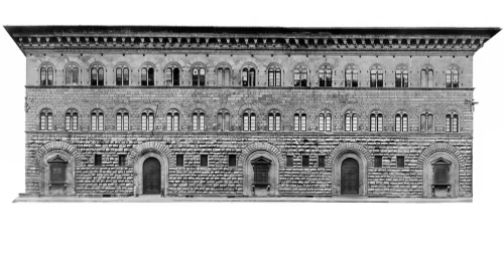By searching a similar case in which the office building played a radical role in the development of the city, we found a precedent in the Italian Renaissance, Florence. Here the palazzo was at first used as private residence, representing a rich social status.

Progressively, it became a hybrid combination of residence and business, like banks or commercial activities. The palazzo in Florence became such an iconic element that it's still considered one of the most recognizable building types, thus integrating part of the cultural and historical values of the city.

So, what if all the post-war office buildings in Rotterdam could rise in dignity and become a recognizable layer of its urban history? And what if their strategic reuse could transform them into platforms for an architectural reinvention, free from the preservation constraints that heritage buildings have in other cities? Then tourists could have as well a PALAZZI of Rotterdam tour.

Does it still make sense then to keep rebuilding now that there is no investment power in real estate? Or does it make more sense to reuse the vacant properties in order to consolidate their urban role? Reuse costs in principle 30% less than new construction. That is indeed a lot.

So how could we develop a method capable of helping stakeholders to afford with confidence a renovation project? And what are the factors that can guarantee the success of a reuse project and ensure its valuable investment? In order to understand this, we studied one of the most successful examples of reuse, the Van Nelle factory.

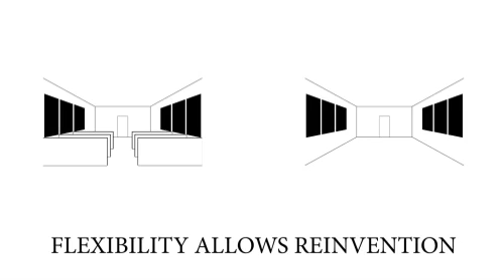On this base, we started a design by research process that at the end brought us to sustainable design proposals. Step 1: Database of office vacancies. We managed to collect over 500 office and utility buildings in Rotterdam, some already renovated, many reused for the creative industry, many more with very inaccessible data.

Step 2: Analysis and maps. Beside the defined vacancy map, we studied the key projects developed by the Municipality of Rotterdam for the City Planning Guides 2030. We superimposed the two maps, and we identified the areas with different speculative power.

The vacant buildings rising on highly speculative areas cannot be subject to reuse, since their owners will wait for the right moment to maximize their investment and substitute them with brand new skyscrapers. By doing so, we managed to exclude from our study the portions of city destined to speculation, concentrating our attention only on the buildings potentially subject to reuse.

Step 3: Database of interventions. By analyzing the global examples of reuse, we were impressed to find out that this discipline is not only diffused in our continent, rich of historical buildings. Even countries in deep real estate boom, such as China, are already developing several reuse projects, often very valuable. With this database of examples, we listed all possible architectural interventions already tested in real projects.

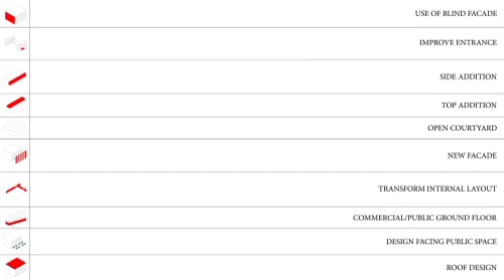Those interventions range from minimal maquillage of the facade, improvement of the visibility of the entrance, to total floor plan reorganization, or extreme building additions and amputations.

Step 4: Evaluation criteria. We based our study on a matrix used in real estate literature to evaluate the possibility of renovating a property. Those criteria are based on location, current state of the building, and market. The ultimate premises of our study are urban. For this reason, we extended the evaluation factors and added the values about the speculative power of the locations.

We created an evaluation system that starts with a long list of possible functions applicable on each building. The evaluation proceeds by eliminating the functions that do not fulfill the minimum requirements for quality of the location, urban speculation, architectural and technological state of the building, and the surrounding quality of the urban space. Only after these evaluations, we reached a sustainable design proposal.

For each building, we produced an evaluation matrix for location, speculation, and for all the other variables. All matrices gave us a short list of possible functions suitable for each building - a real ID for renovation. The complete evaluation package gave us the possibility to work together with municipality and stakeholders in order to find tailor-made solutions for the reuse of the selected buildings.

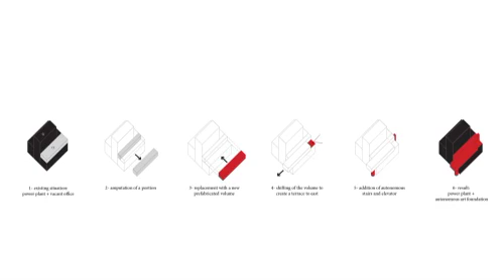Its marketing program includes a biannual promotion of fine arts and classical music. The current situation combines the main production building with a small office space. We amputate part of this space and replace it with a new prefabricated volume. Then we shift this volume to west in order to create a terrace to east. We add autonomous stairs and an elevator, and create an autonomous building on top of the existing one.

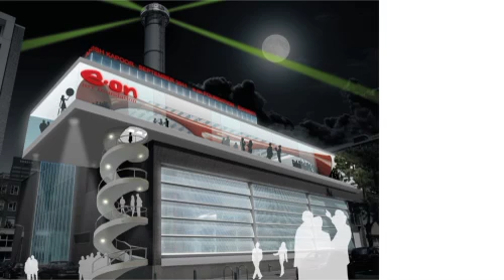The E.ON Art Foundation internalizes the marketing investments of the company, while adding a new cultural facility in the heart of the city. The management of the foundation can be easily carried on by one of the several private art institutions, while remaining a flag of the E.ON cultural involvement in Rotterdam.

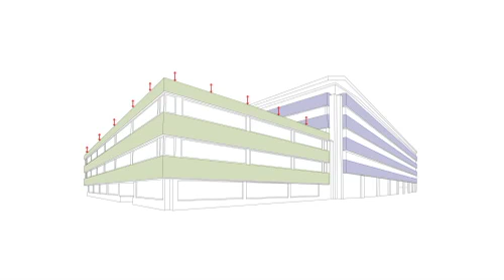Case Study 2: Zalmstraat Houtlaan. These two office buildings, ranging from 2 to 4 floors, stand in front of the Erasmus Bridge, one of the most exclusive locations in the city. Both buildings have a linear facade pattern. The lower building has the potential to extend vertically, due to its current poor use of the roof that becomes an unavoidable panorama from the taller building.

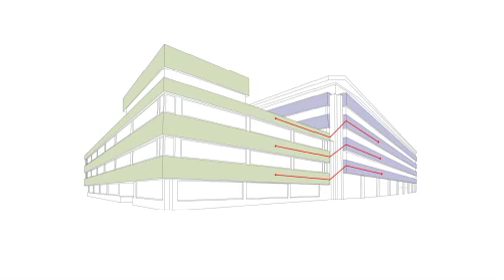For this reason, we add a penthouse on its top, with a private garden and a very luxurious view on the bridge. In light of the linear continuity of the two facades, we propose to wrap the two constructions with a unique surface, capable of making a unique building out of the two.

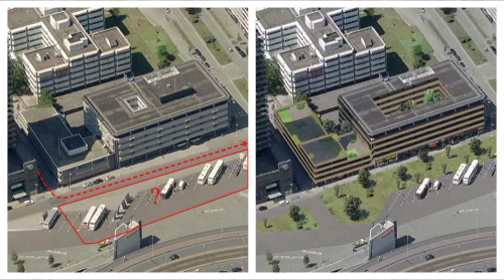On the urban level, the block suffers the poor quality of the public space, currently used as traffic circulation and bus terminal. We suggest to offset the traffic far from the facade and create a green plot only for pedestrians.

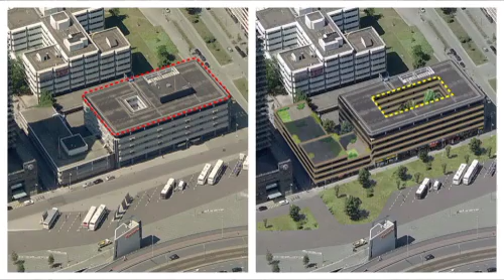The taller office building presents a very deep floor plan, difficult to adapt for other uses. Our vision proposes to open a courtyard in the central part of the plan, preserving the existing circulation course. This operation converts the building into a gallery housing type, with added natural light in the internal courtyard.

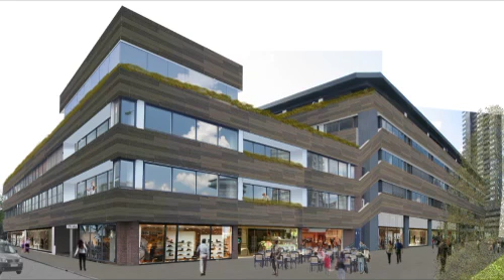The two buildings, both used as apartment blocks with different housing types, finally become active, thanks to the added commercial use of the ground floor, open on the new square.

Case Study 3: Shell Building. This tower counts more than 5,000 square meters of leasable office space. By now, a minimal part of it is rented. As opposed to the previous example, we propose to fragment the tower into 4 autonomous stacked buildings, capable of differentiating program and tenants.

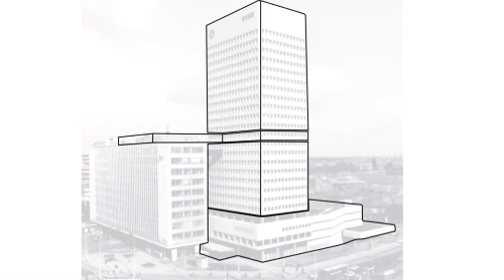A plinth, dedicated to commercial uses, with a supermarket and a department store. A newly defined office block, which now counts less than 5,000 rentable square meters. Above the office we add the only new element, a panoramic sky lobby used as club restaurant.

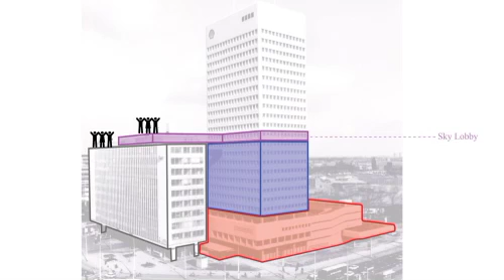This extruded volume reaches the adjacent building and sits on its roof, making it perfect for open-air activities. The last top piece of the tower hosts new apartments and penthouses, far enough from the traffic of Hofplein Square. The intermediate terraces are redesigned as green spaces, implementing the overall green performance of the complex.

The newly defined tower becomes a machine, an icon for the new sustainable developments in the center of the city.

These are just a few of the possible properties worth transformation. If more stakeholders would finally embrace the renovation policy, and if the municipality would stimulate them by simplifying the local building permissions, facilitating their investment agenda, the city could finally save its modern history and have a Palazzi of Rotterdam tour.